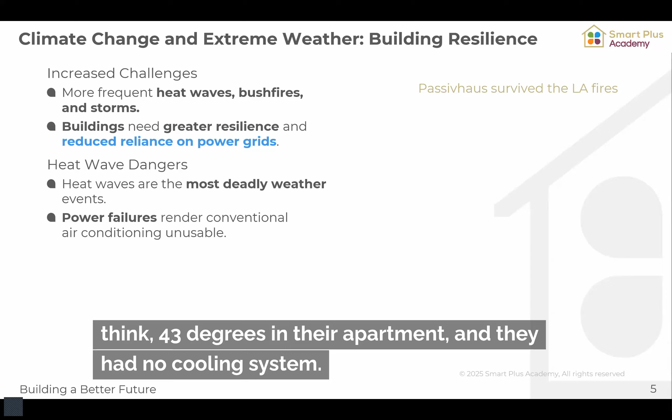When was that? Last summer, I think. There was an article in Australia where a resident was measuring, I think, 43 degrees in their apartment, and they had no cooling system. That's super, super dangerous. In 2003, we had nearly 70,000 people dying in the EU because of a 2-week heat wave, and that's coming more and more often as these changes keep happening.

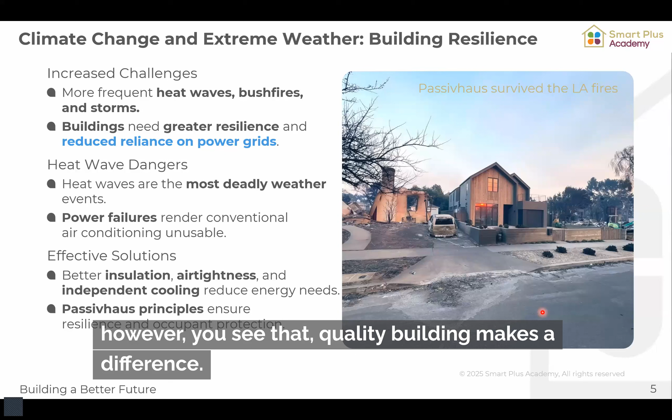Effective solutions are needed. We need better insulation, better air tightness, and an independent cooling system - and that is all what we have in the Passivhaus principles. I don't know if you've seen the posts all over social media regarding this special house that survived the LA bushfires - that was a Passivhaus. Passivhaus didn't necessarily make it survive, however, you see that quality building makes a difference. If you're thinking about how you're actually executing a building, you can have these benefits.

And everything else is burned down except this building in that state. So there you see that there can be a big difference.

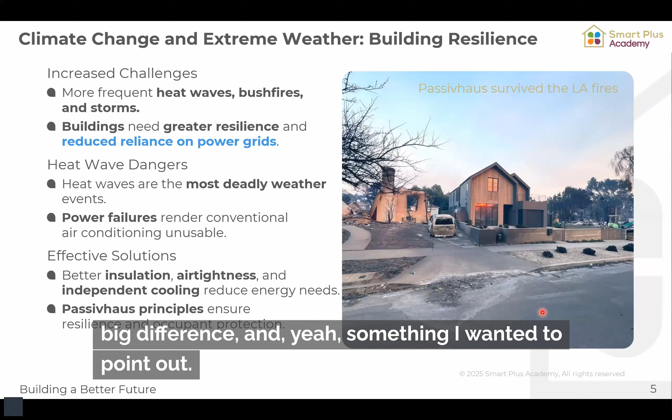Something I wanted to point out: electrification of everything is happening. We have a rising demand on our grid coming from this. Our buildings, electrification of transportation, all the electric cars, industry going electrical too, even steel plants, as we move away from gas and liquid fuels. This is putting a lot of stress onto our electrical system, our electrical grid, and that's what we have to consider in our design, because of the skyrocketing demand we are seeing.

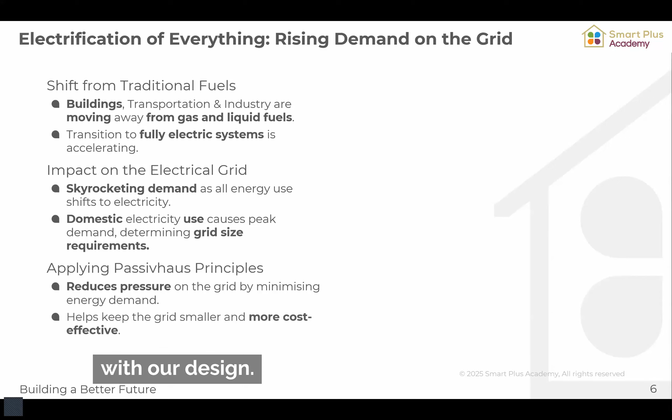This demand is mainly domestic, and we can change that by applying the Passivhaus principles. We can reduce the pressure on the grid and help make the grid more cost effective with our design. That's not necessarily a benefit to the builder, and not necessarily a benefit to the client, the end user, but society would actually benefit from that. That's something governance and decision makers need to consider moving forward.

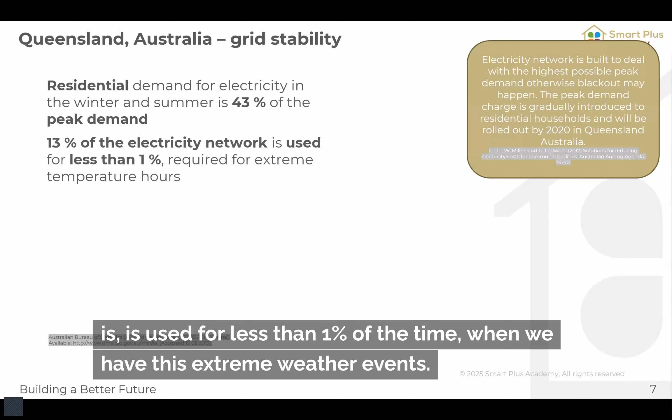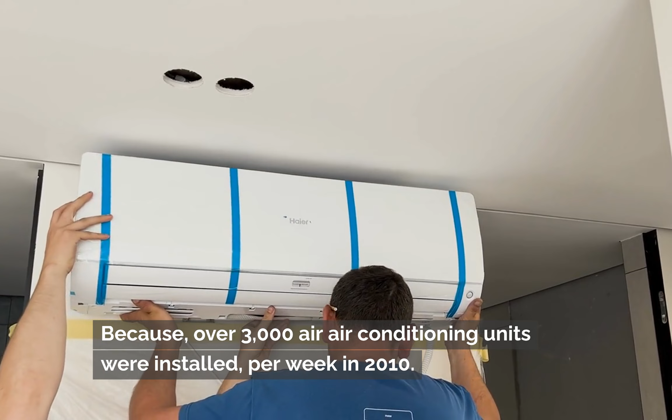Here's an example from Queensland that's already a few years old, but it shows exactly what the problem is. Residential demand is responsible for 43% of the peak demand, and 13% of the electrical network is used for less than 1% of the time, during these extreme weather events. Why is that happening? Because over 3,000 air conditioning units were installed per week in 2010. In Queensland, they had this massive investment into the electrical network, 15.6 billion dollars, which explains why 49% of the cost is actually network cost.

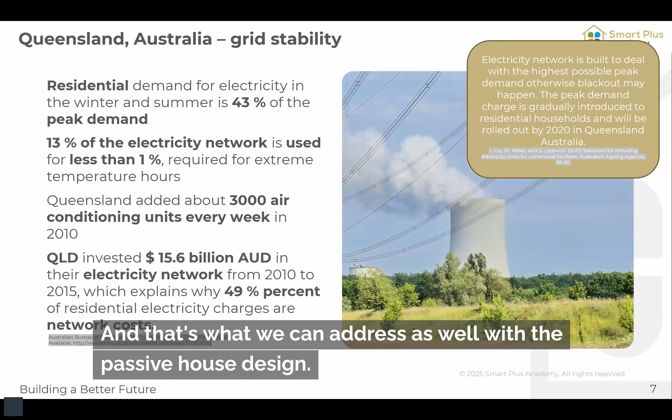Considering that everything needs to go now through these copper cables - everything that we used to put into our tank, the gas, the liquid fuel, needs to go through the copper cable - we need to expand this grid massively. However, if we create even higher peaks, that will start to become really, really uneconomical. And that's what we can address as well with the Passivhaus design.

Then there's bushfire smoke and indoor air quality. I guess we all remember 2019, where pretty much everywhere was smoke. With Passivhaus, we have an airtight building and mechanical ventilation, and by this we're able to filter the smoke out of the air, having better indoor air quality. For me it was really bad in 2019 because the smoke was just coming in, and I was trying to record videos and stuff, and I got asthma, itchy eyes, running nose, everything. So it was pretty bad. We can avoid that by living in a Passivhaus. Unfortunately I'm not living in a Passivhaus yet, but hopefully soon that will be happening.

So now let us look into Passivhaus principles and the benefits. First of all, we hear it all the time.

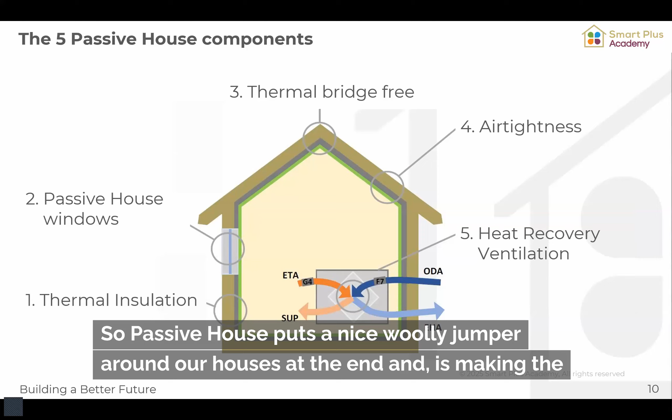There's thermal insulation. Passivhaus puts a nice woolly jumper around our houses, protecting the house against the thermal difference from the outside. This thermal insulation doesn't care if it's hot outside or cold outside. It stops the energy flow - it doesn't know where inside and outside is, it just stops that energy flow. And by that we have a far better performing house.

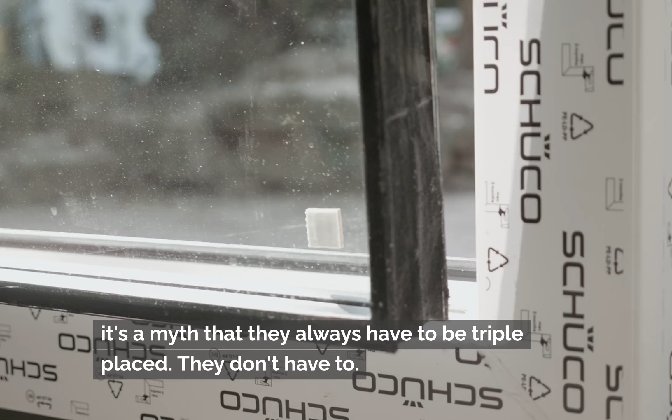Then Passivhaus windows. These are just windows designed for your climate and your location, so you don't have too much energy coming in. It's a myth that they always have to be triple glazed - they don't have to. Often in Australia in particular, we get away with double glazing because we have such a mild climate, and double glazing is good enough.

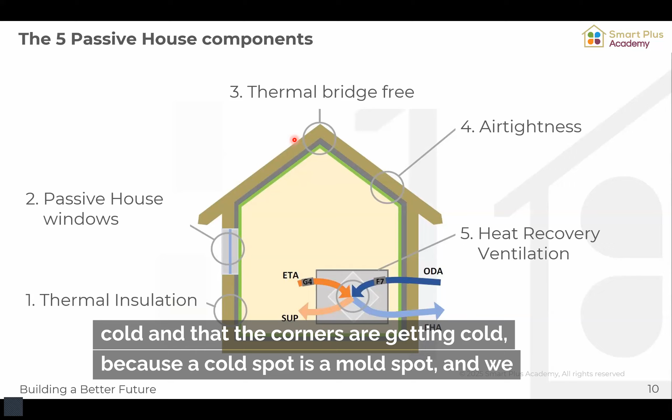Then thermal bridge-free design. That's where we make sure that nothing is getting cold, that the corners aren't getting cold, because a cold spot is a mold spot, and we want to avoid mold in our building for health reasons. Thermal bridge-free design is for me far more a health requirement than actually an energy efficiency requirement, and that's often misunderstood as well.

And then we have our air tightness, which is like putting a windbreaker over our woolly jumper. By that, we can have the biggest wind outside, but the thermal insulation is still working - our thermal woolly jumper is still working even when we're out in the wind. And that's what the air tightness is actually doing.

It helps us to get the thermal insulation to perform, that's pretty much what it is helping us. Otherwise, we have wind washing, and the wind washing is then reducing the performance. As we are now creating pretty much a closed box, we need to have our heat recovery ventilation unit that is ventilating the house and making sure that we're having fresh air in the house.

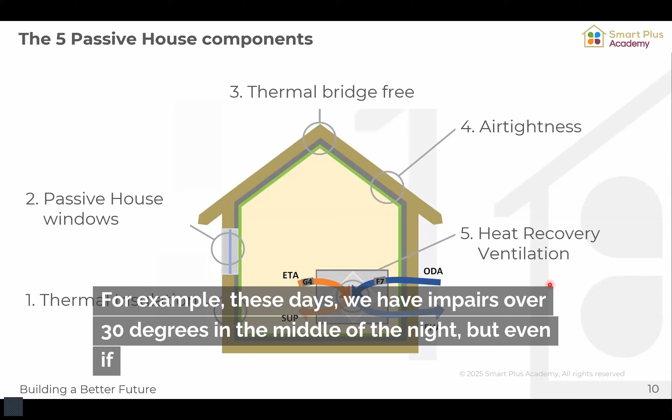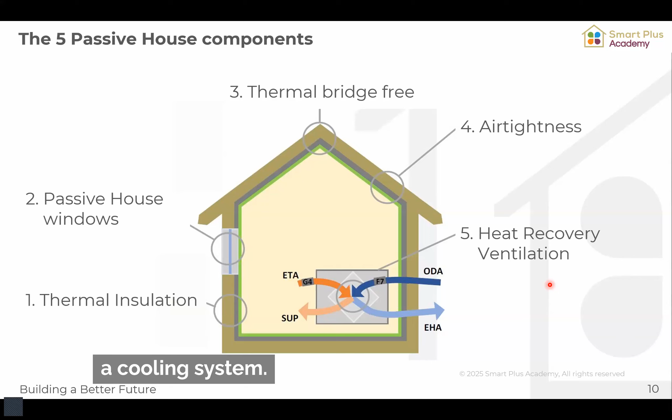Unfortunately, natural forces are not reliable. So just opening a window or having holes in your wall to have fresh air coming in is not sufficient, because the pressure difference between inside and outside is always changing. For example, these days we're having in Perth over 30 degrees in the middle of the night, but even if you open your windows, no air is moving at all, and you're just melting away if you're not having a cooling system.

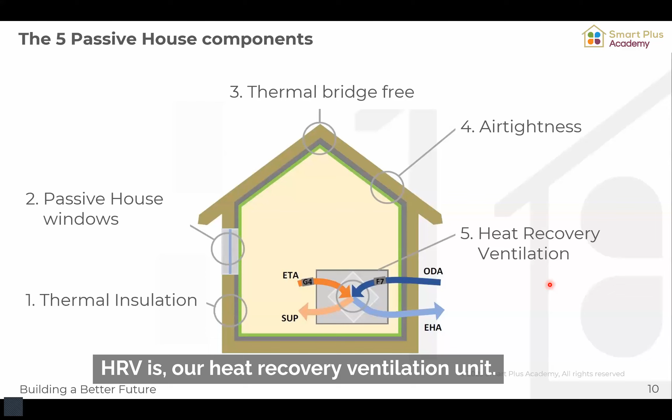So this idea of natural ventilation using natural forces doesn't work. That's the reason we need a mechanical force to actually move the air around, and that's what our HRV is, our heat recovery ventilation unit. If you're ventilating with mechanical force, then it makes sense as well to recover the heat so that the outside temperature is not coming into the building when we are ventilating. So at the end, it just keeps the indoor temperature indoors and the outdoor temperature outdoors.

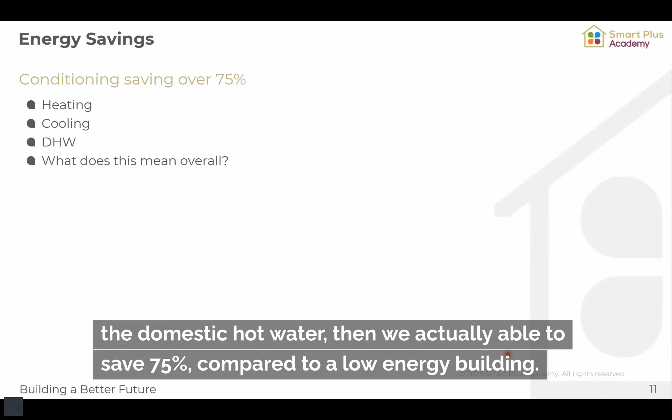So when we are now looking to how much energy we can save on the heating, the cooling, the domestic hot water, then we're actually able to save 75% compared to a low energy building. If we're comparing it to a traditional construction, then it can be savings of over 90%. And that's what Passivhaus is giving us for a little upfront investment.

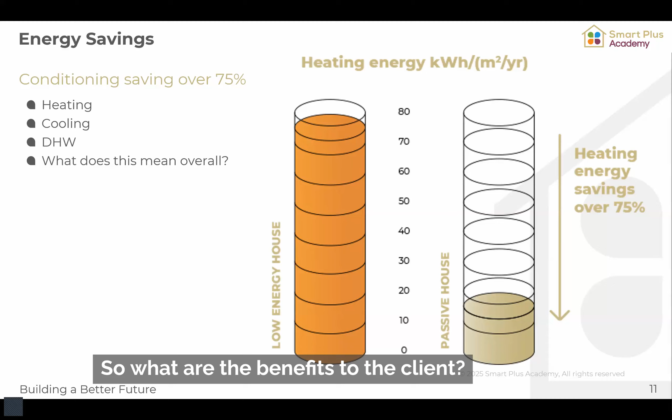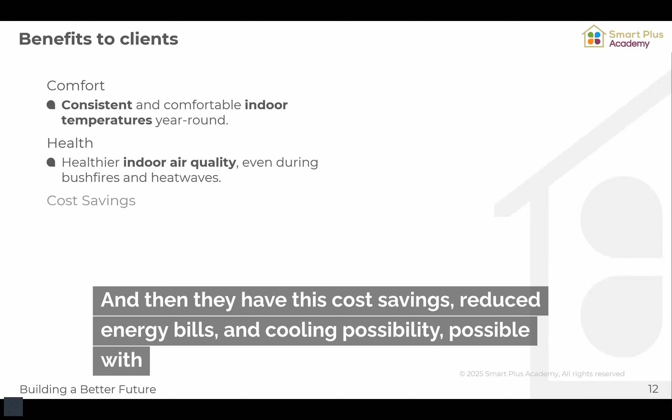So what are the benefits to the client? We have this consistent indoor temperature and indoor environment. We have the indoor air quality as well during bushfire and heat waves. And then we have this cost savings, reduced energy bills, and cooling possibility possible with solar energy production on site.

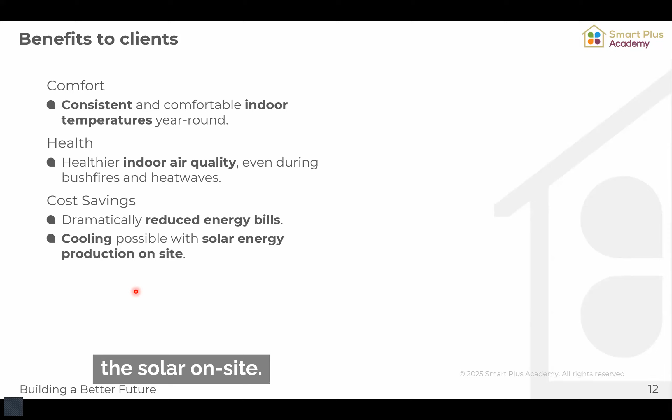So I think we should always design a building in a way that we can cool the building with energy produced on site, because if there's a power failure, then we can still cool our building with the solar on site. And that is as well possible with the Passivhaus approach, because the load that we are requiring for cooling is so small that we actually can achieve it with our little solar system on the roof. So, and then everybody's happy.

And as a client, the additional financial burden in the first year for Passivhaus is a coffee a day. That's all what it costs you, a coffee a day, the $4.73. After 10 years, it's a 7-Eleven coffee. And then after 19 to 20 years, we're coming to the break-even point.

And then after 30 years, when the loan is paid off, you're getting a free lunch every single day because you invested in efficiency, the loan is paid off, and now you're not having this running cost any longer. And with this, we are having our free lunch every single day.

This is not considering yet the benefits of green loans. So we can get green loans and lower interest rates. And with the lower interest rate, we're having a higher borrowing capacity, and our monthly would be actually lower than if you would buy a build conventional.

So sometimes we're coming actually to that point already that you have a benefit from day one if we are able to get green loans with a good reduction in our interest rate. And as well, projects that have fallen through before might be able to get through if you're going for Passivhaus, because with a lower interest rate, you're having a higher borrowing capacity. And with the higher borrowing capacity, you might be able to finance even the Passivhaus, because that lower interest rate is not just for the Passivhaus components, it's for the whole build. And by that, you're able to have a benefit.

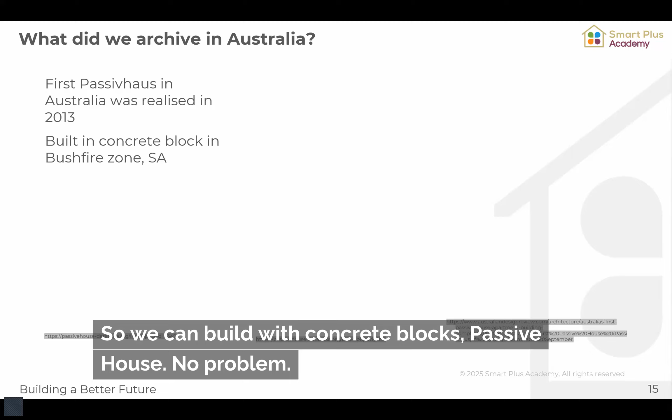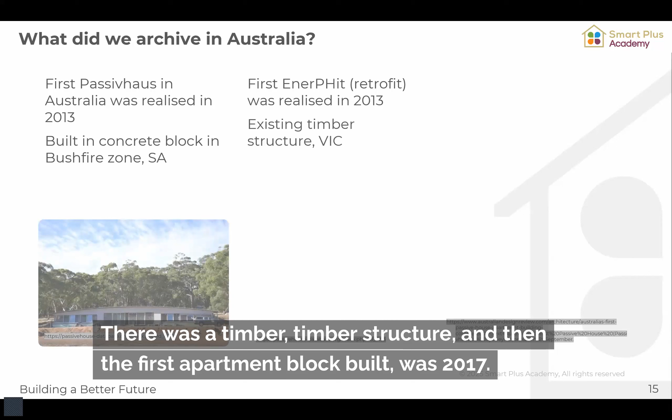So let's look at Passivhaus in Australia. Passivhaus started over 10 years ago in South Australia, where they built in a bushfire zone, and it was a concrete block building. So we can build with concrete blocks, Passivhaus, no problem. Then the first retrofit project was as well in 2013, and that was in Victoria. There was a timber structure, and then the first apartment block built was 2017. A little bit later, that was in New South Wales, and that was a concrete construction, conventional.

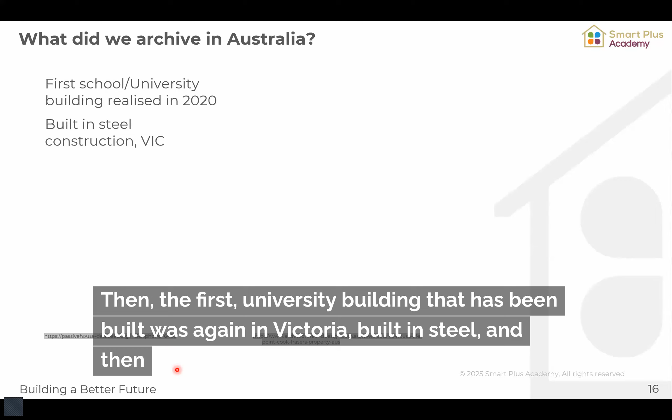Then I forgot the update - the first university building that has been built was again in Victoria, built in steel, and the first major developer was also in Victoria, though I don't know what construction method they used.

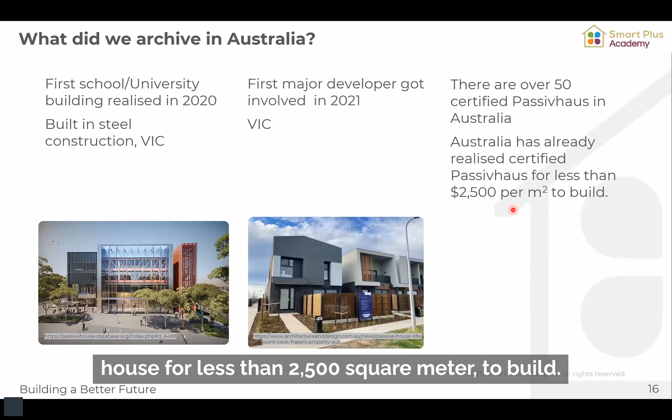It's not 50 certified passive houses anymore, it's now above 100. The more important part is that we achieved passive house for less than $2,500 per square meter to build. That's not the additional cost, that's the whole building cost, the square meter cost for building a building. And we've achieved that multiple times in Australia already.

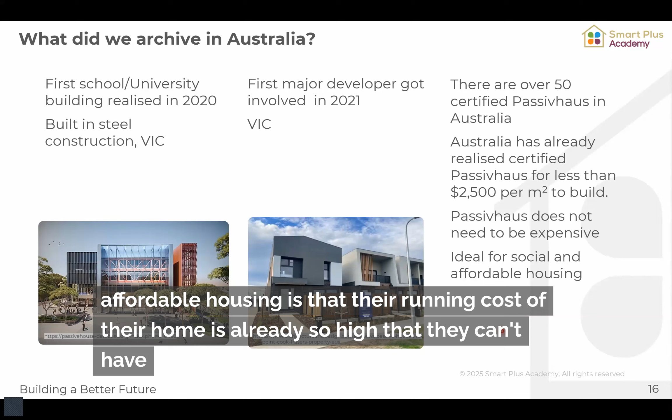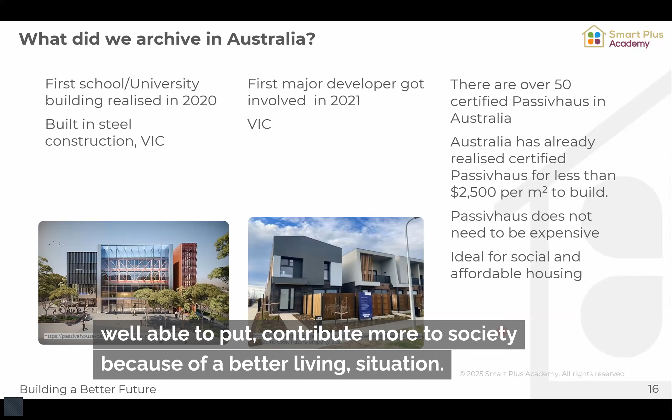So passive house does not need to be expensive. It's ideal for social housing and affordable housing, perfect for government projects, because the biggest threat for people who need social housing is that their running costs are already so high they can't have a proper life. If you give them a house that doesn't need so much running cost, they can afford better food, better education, and their lifestyle will be far better, and hopefully they're able to contribute more to society because of a better living situation.

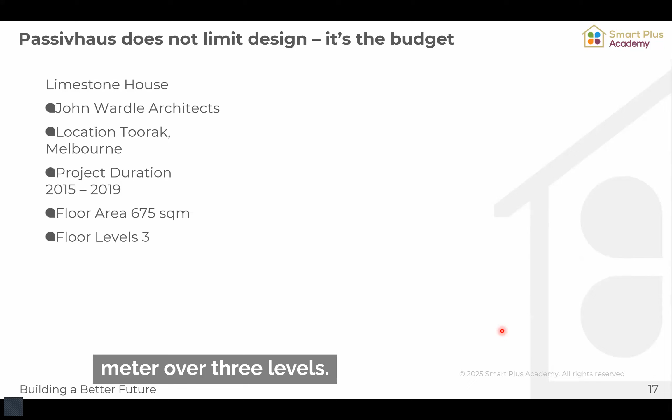However, it doesn't need to be that way - we can build crazy too. Here's John Wardle Architects, located in Melbourne, built between 2015 and 2019, 675 square meters over 3 levels. It won a passive house and living building challenge rating. This building cost a few million to build - I heard rumors it was around $8 million. So passive house can be expensive as well.

Passive house is not limiting your design, it's your budget. Keep that in mind - passive house can be really affordable and cost effective, but you can design everything to the passive house standard.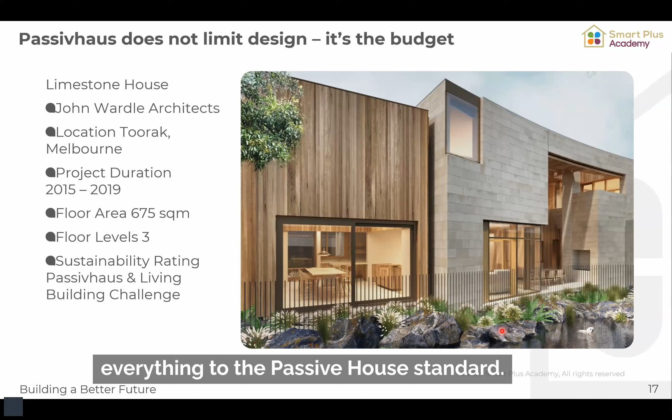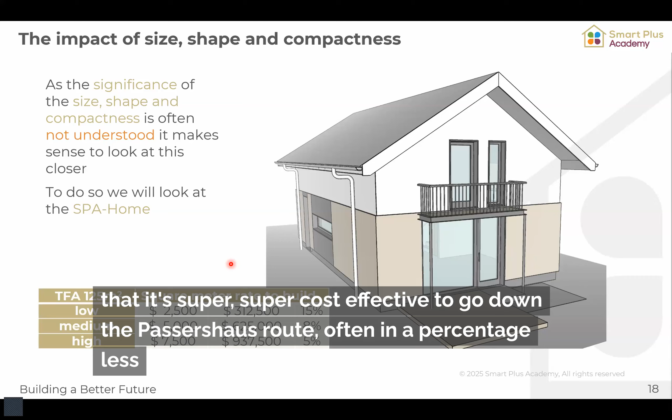This is because the passive house components are the same - it doesn't matter if it's high end, low, or medium, because we're not putting in a golden sheet instead of a high-performing membrane for air tightness. So no problem - the higher end the building, the more cost effective it becomes, especially commercial, because the ratio between building envelope and usable space is such a benefit that it's super cost effective to go down the passive house route, often in a percentage less than 1% or around 1%. So commercial works really well.

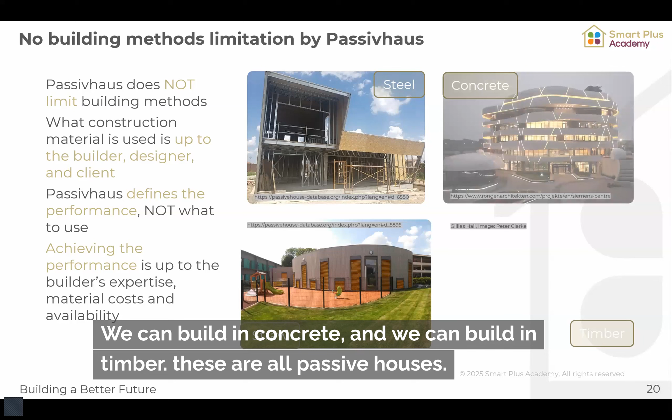So does passive house limit building methods and design? No, it does not. As we've already seen, we can build in steel, straw bale, concrete, or timber - these are all passive houses. Passive house is not limited in the building methods we use. It's a performance standard, not a material standard. So you decide what you use.

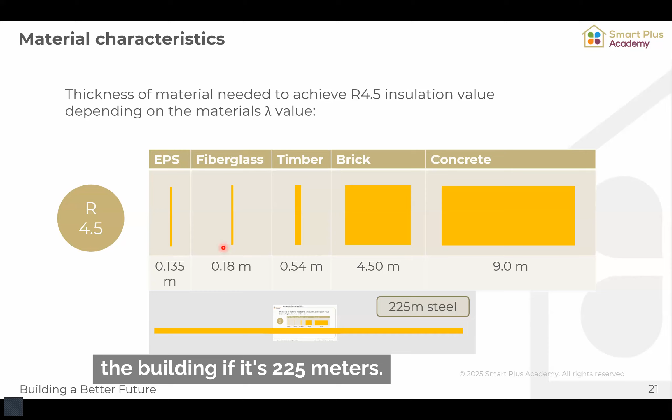For example, if you need an R value of 4.5, you can use EPS of 0.135 meters, so 135 millimeters, or fiberglass with 180 millimeters, or timber - CLT - which would need 0.5 meter thickness, or brick, which would need 4.5 meter thickness of a brick wall - you're not getting so much out of your lot any longer. Or use reinforced concrete, then we're at 9 meters, or steel, which needs 225 meters of thickness to achieve that R value of 4.5. Obviously that makes no sense, and you'd have a pretty far walk from your front door into the building if it's 225 meters, but you decide what material to use.

We are not saying one is better than the other. You use what is right for you, and it's not limiting design.

Even the Sagrada Familia in Barcelona could be a passive house if we would want to do it. Obviously, they're building now over 100 years on it already, and making a passive house would add a few years more, obviously, but theoretically it would be possible.

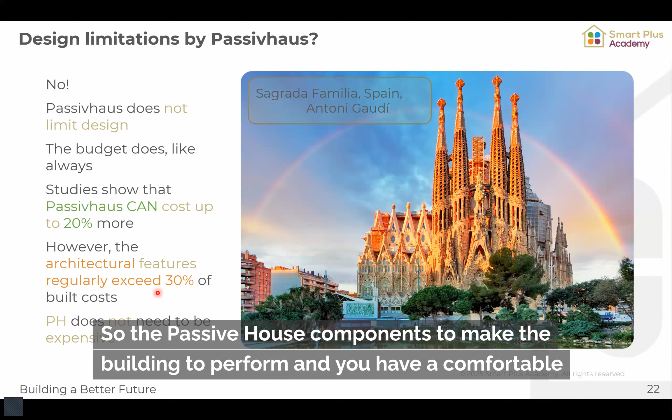We can say that a passive house can cost up to 20% more. However, we see that regularly architectural features cost 30% more. So the passive house components to make the building perform and give you a comfortable life are far cheaper than your architectural components, like your glazed handrails or your designer glass top that you're only using once a year, while you could get a really high performing building for far less than the architectural features.

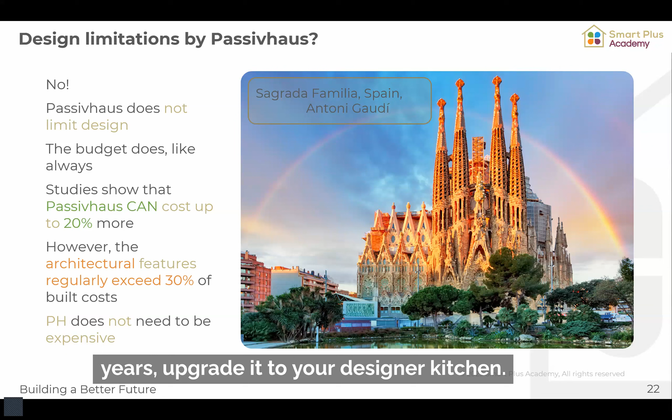And as well, you can only do that passive house stuff when we are building or when we are doing the retrofit. Architectural features can as well be updated in the future. So if you want to have your designer kitchen, maybe go first for an IKEA kitchen and then in 10 years upgrade it to your designer kitchen. And by that, you can still afford your passive house.

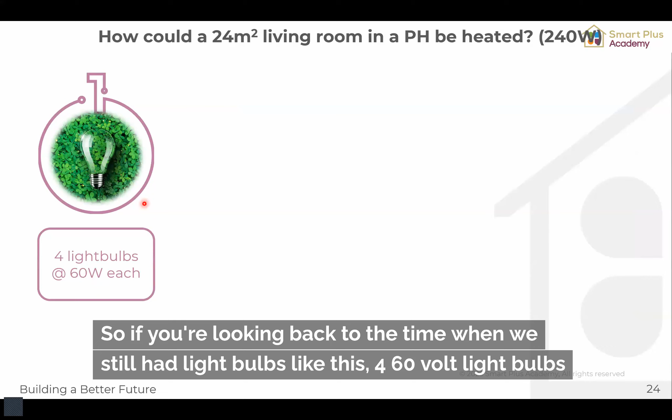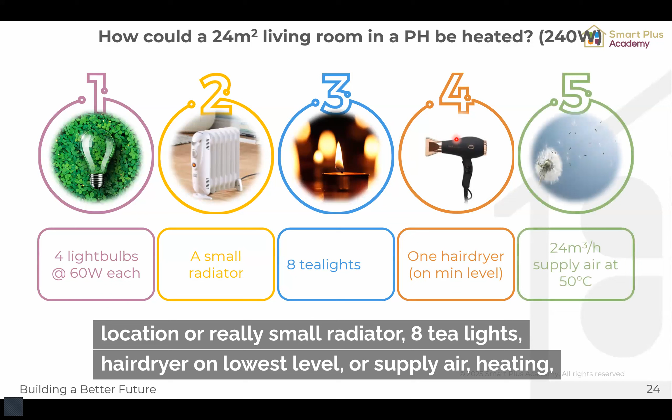So how energy efficient is a passive house? If you're looking back to the time when we still had light bulbs like this, 4 60-watt light bulbs would be enough for 24 square meters of living space to heat that on the coldest day of that location, or a really small radiator, 8 tea lights, a hair dryer on lowest level, or supply air heating, what is possible in a passive house.

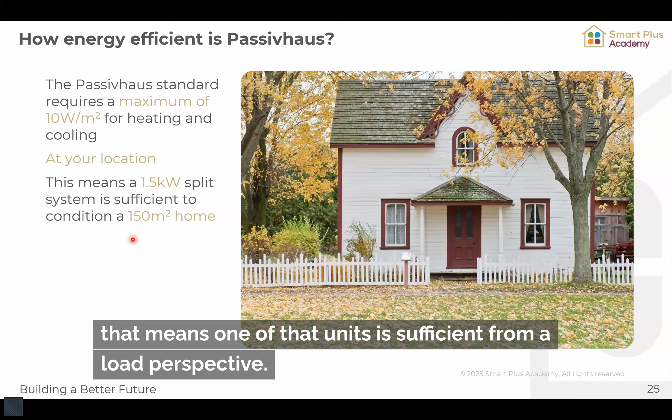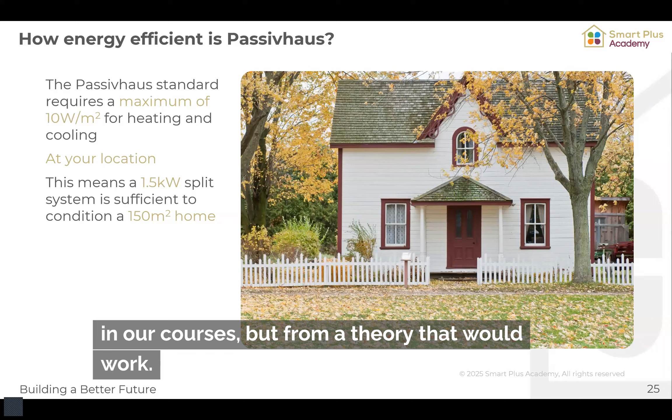But maybe going a bit too deep here already on what passive house is. If you're looking now to our 10 watts per square meter, and we are saying we have a 150 square meter home, then a 1.5 kilowatt system would be enough. These really small baby splits that we have, they're normally already 2 kilowatt or even 3 kilowatt per unit. That means one of those units is sufficient from a load perspective. I mean, it makes no sense to have only one outlet, but theoretically we could condition our passive house with just a baby split if it's 150 square meters. How to design your cooling is something we cover in our courses, but from a theory that would work.

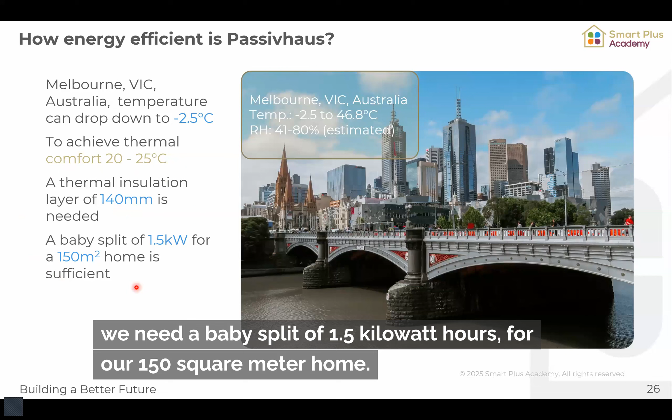So if you're now, for example, looking to Melbourne, where we have the lowest temperature of minus 2.5, then we want to achieve our 20 to 25 degrees. To achieve that, we would need a thickness of insulation of about 140 millimeters. And then we need a baby split of 1.5 kilowatt for our 150 square meter home.

If you're now going to an extreme, the Charlotte Pass in New South Wales, where the temperature goes down to minus 23 degrees, we want to achieve again our temperature between 20 and 25 degrees, but now we need thermal insulation of 340 millimeters because we are protecting against a higher thermal difference. And that's the reason we need a thicker insulation. That's like you're putting more layers of clothes on, because it's actually getting colder. And that's what we're doing here as well.

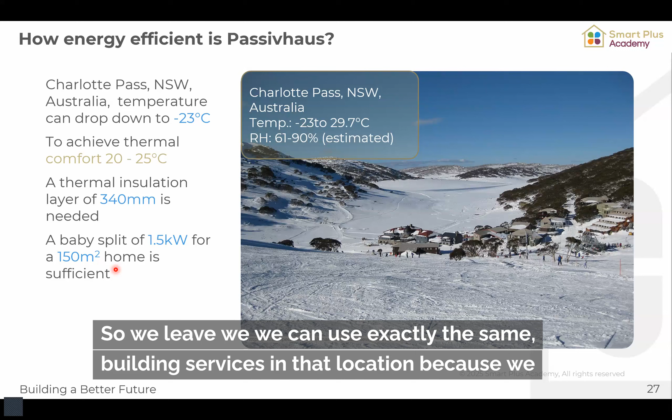And now we need, again, just a baby split of 1.5 kilowatt for a 150 square meter home. So we can use exactly the same building services in that location because we designed it so that it is efficient as a passive house, and all of them can work with the same building system.

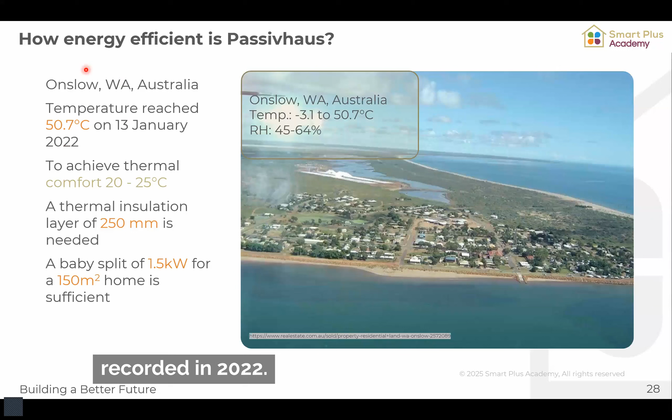If you now go to Western Australia, the hottest place where a temperature of 50.7 was recorded in 2022, there we again want to achieve the temperature between 20 and 25 degrees. And now to achieve that, we need 250 millimeters of thermal insulation. Now the thermal insulation is actually protecting us against the heat, not the cold. And here again, our baby split of 1.5 kilowatts for cooling is sufficient for our 150 square meter home. So that's how it works. Simple, easy, straightforward. And that's the beauty of a passive house.

If you're having a house designed that you spend a lot of time on designing, and now you want to build that house in multiple locations, the only thing you have to change is your thermal envelope performance, the thickness of your thermal insulation, maybe the glazing of your windows, and that's all you need to change. The rest of the building can stay the same.

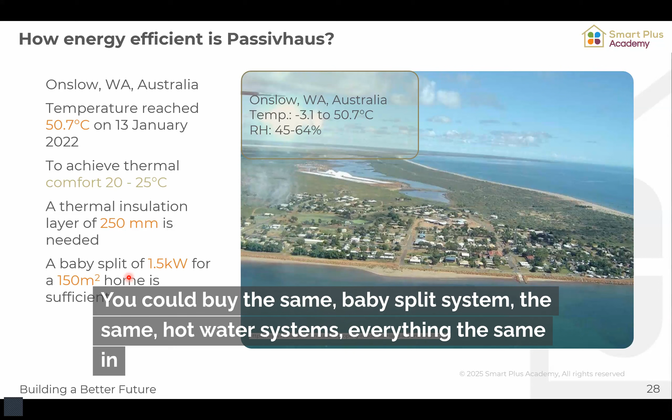Especially if you're going down the prefabrication route and modular construction, this is such a huge benefit because you don't need to change your systems. You could buy the same baby split system, the same hot water systems, everything the same in quantity, and actually use that. It doesn't matter where you build because the performance will always be the same.

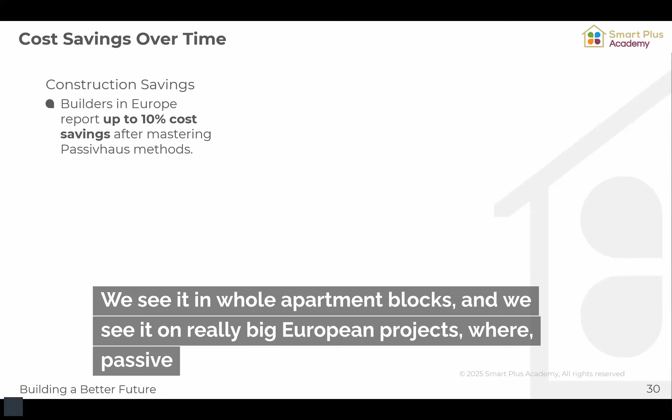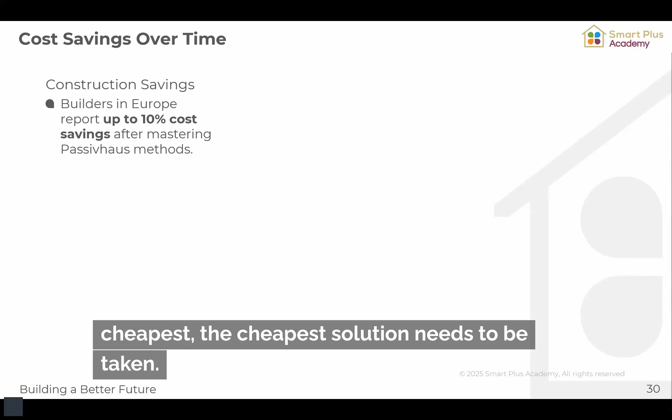That's a huge advantage of Passivhaus. So now a real world example, more on the builder side. What is the benefit of Passivhaus? Cost savings. I know from builders in Europe who report that after normally 7 years, they can deliver Passivhaus for 10% cheaper than conventional buildings. We see this more and more in residential freestanding houses, in whole apartment blocks, and in really big European projects where passive houses win the rigorous tendering process, where the cheapest solution needs to be taken. Often passive houses win this process, not because they're passive houses, but because they're cheaper.

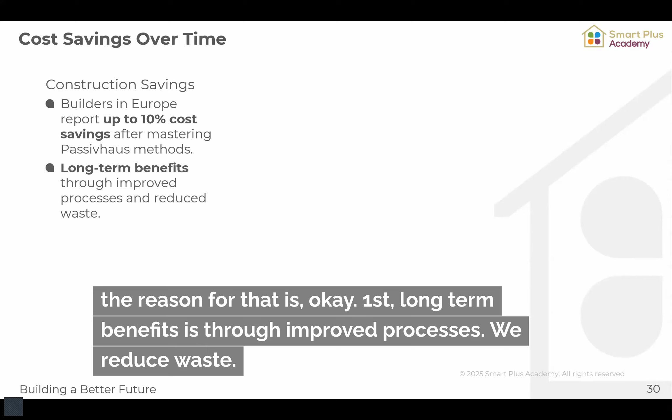The reason for that is, first, long-term benefits through improved processes, we reduce waste. With this, we need less material. With this, we're saving on the material side and having a smaller impact on the environment. Then through standardization, we streamline workflows, and with this we're able to reduce mainly labor costs. So now from a performance perspective, this is looking to the client's benefit again.

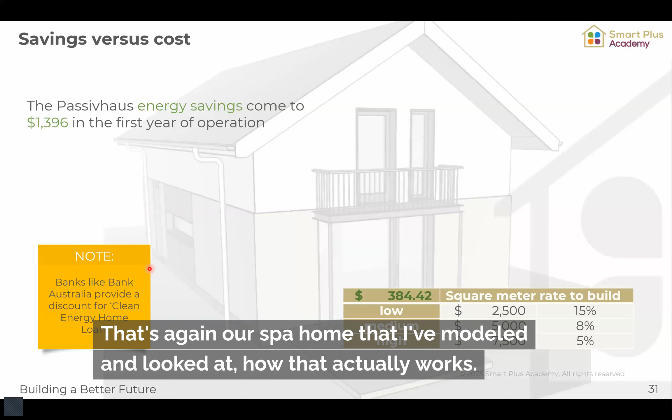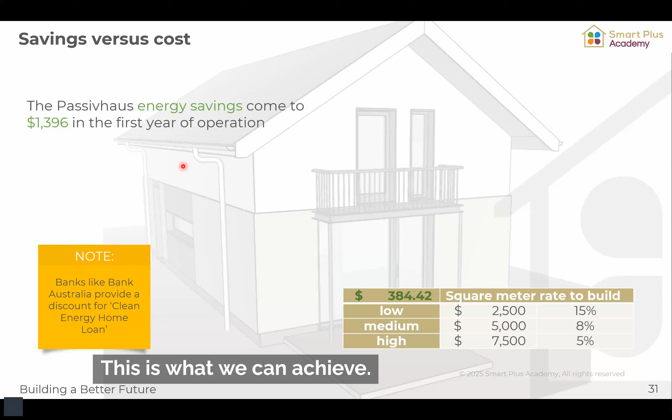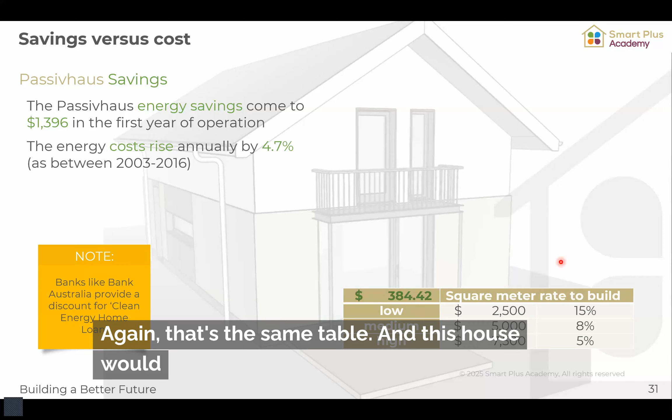That's again our spa home that I've modeled and looked at how that actually works. We said we're having a saving of $1,396 a year in energy savings for that house, to some extent from domestic hot water, but mainly conditioning. This is what we can achieve. The energy costs are rising by 4.7%. The additional cost for Passivhaus is just under $400 per square meter. Again, that's the same table, and this house would cost an additional $48,000 if we build it like this.

However, if it's a developer building the same house over and over again, I spoke with a guy who said he's able to push that $48,000 below $20,000 in additional costs if they develop something like 20 houses in one go, because the architecture costs and the modeling are strongly reduced and they can buy material far cheaper. So the additional cost becomes $20,000.

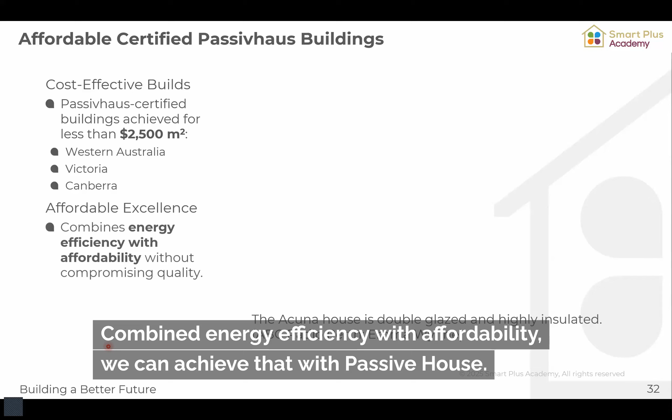So we have a lot of benefits here as well. Affordability of passive house is possible, as already mentioned. We've achieved multiple passive houses for less than $2,500 per square metre, in Western Australia, Victoria, and Canberra at least. There might be more places now, and affordable excellence is possible, combining energy efficiency with affordability. For example, this Acuna house by Carlos Acuna in WA, where they achieved that.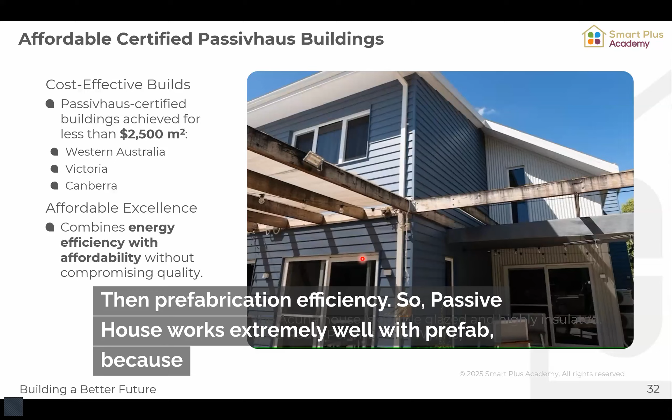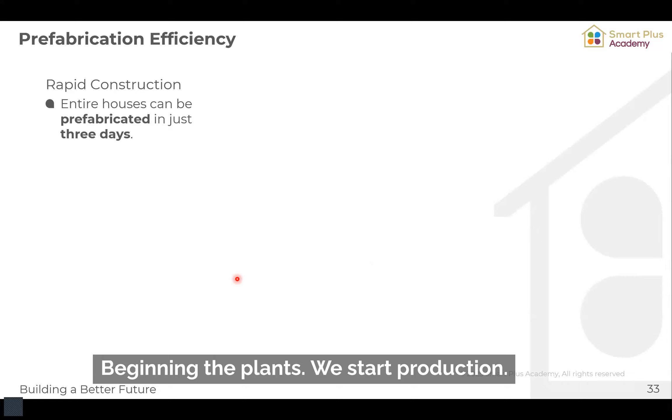Then prefabrication efficiency. Passivhaus works extremely well with prefab because it's not just a philosophy and an energy efficiency standard, it's also a process of walking through a building. Entire houses can be prefabricated in just 3 days. That's what we've already achieved. We get the plans, start production, and 3 days later the house panels are standing in the factory. This is possible, and by this we're reducing labor costs and having faster project times.

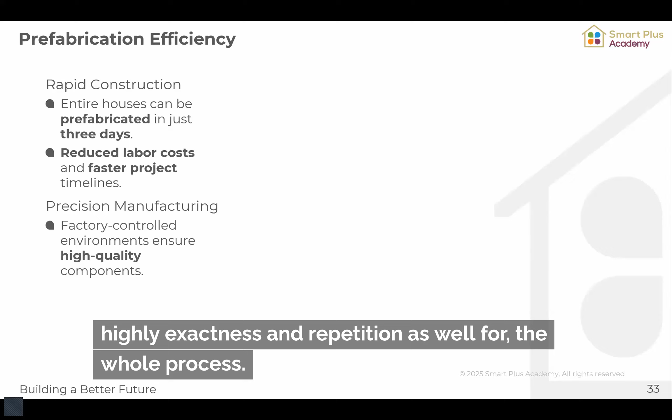So we're saving for the client the double cost of renting and paying for that building project, and we're saving on labor costs for the builder too. By that, we can actually reduce cost. And then the factory controlled environment creates high exactness and repetition for the whole process, and with this we're able to save energy again.

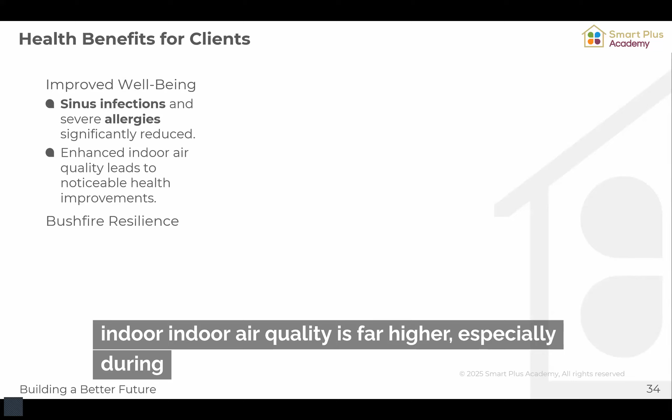Now back to the client. The clients have then improved well-being. I know clients that have less sinus infection, allergies and asthma. The indoor air quality is far higher, especially during bushfire, so we can filter out the bushfire smoke and pollen for people having hay fever. We can help these people, like the client down in Denmark. So this is as well an advantage.

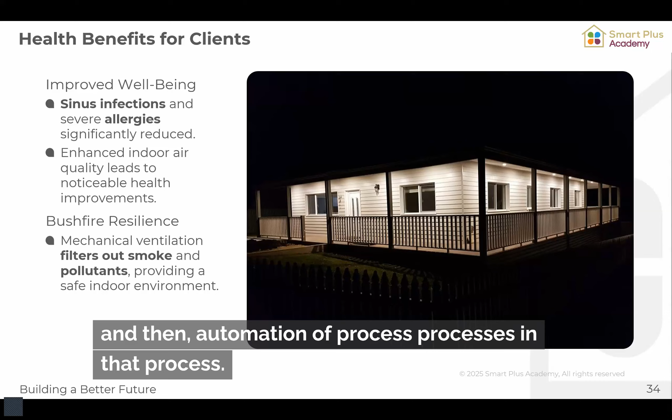Another one on the builder side is that we're anyway creating a digital twin for the performance already. And this digital twin is something that we can then use in the prefabrication process. By that, Passivhaus is able to work hand in hand with prefabrication, digital twin, and automation of processes.

So when we look at our Passivhaus Tradesperson course, it's far more than just a course. It's the foundation for high-performing buildings, like our students here in the chat, and it's future-proofing for builders. You're staying ahead of regulations, so you don't need to change your detailing and execution the whole time because you're already outperforming your required performance. You're having far fewer changes in your building company because you're staying ahead of regulation changes and don't have to change it every few years.

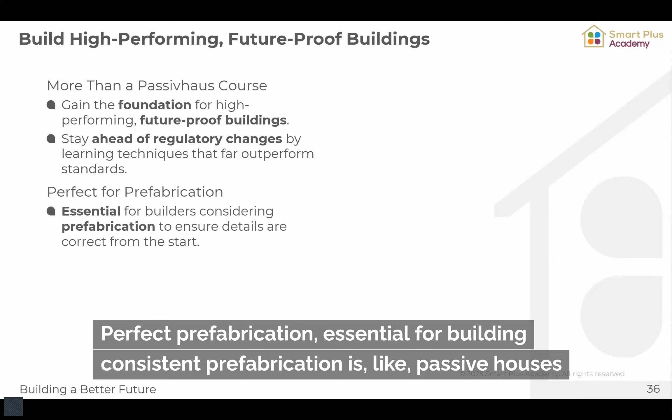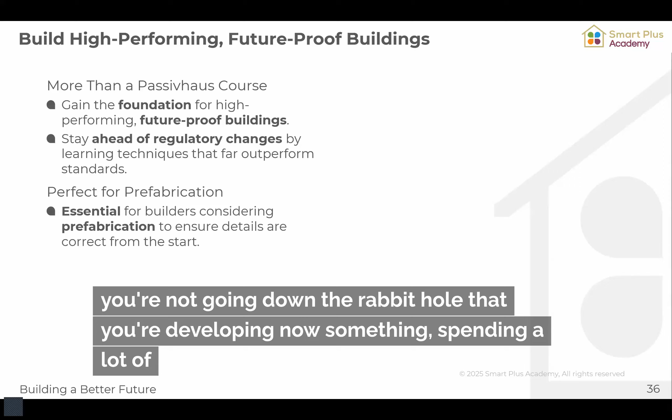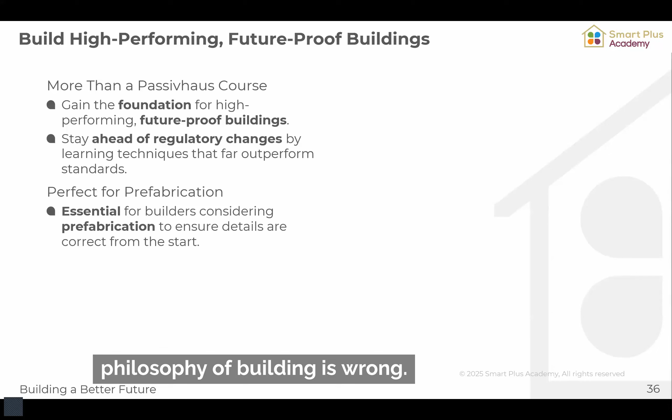Perfect prefabrication is essential - building consistent prefabrication means passive houses need to be already really exact. If you're going down the prefabrication route, you need to get your detailing right so that you're not going down the rabbit hole of developing something, spending a lot of money on it, and then a few years later realizing your whole detailing and philosophy of building is wrong. That's the reason you really need to do this course if you want to go down the prefabrication route, to understand how the buildings of the future will be built - not necessarily because of the Passivhaus qualification you're gaining, but because of the knowledge you're gaining that is needed as the foundation for future-proof buildings.

And then we're having prefabrication success only with precision, and this is what Passivhaus is already asking for - that precision - and that helps already.

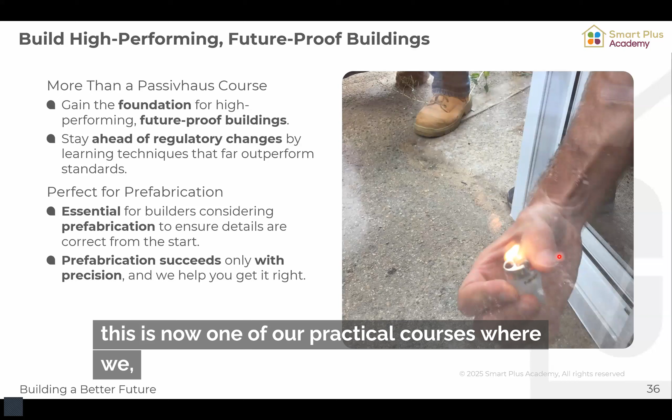This is now one of our practical courses where we're showing where the layer of coating is on the window, that's what the picture is showing. Then in the tradie course, we're showing really clear solutions like we can see here - our timber frame solution, the Californian corner - explaining why the conventional approach is not working because we are not putting thermal insulation in that corner where we already have a thermal bridge. With no insulation in there, we have far worse situations. That's the reason we are showing that in a really simple way.

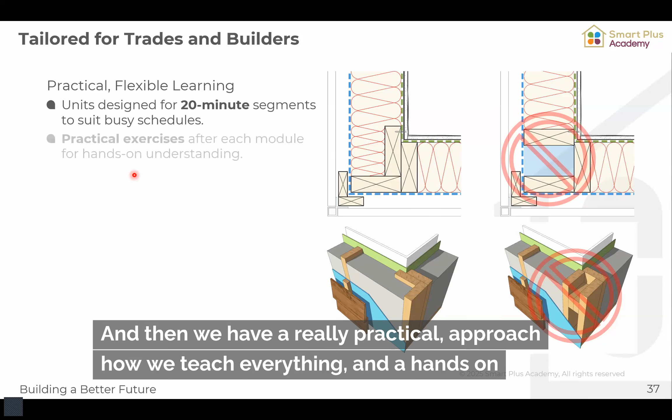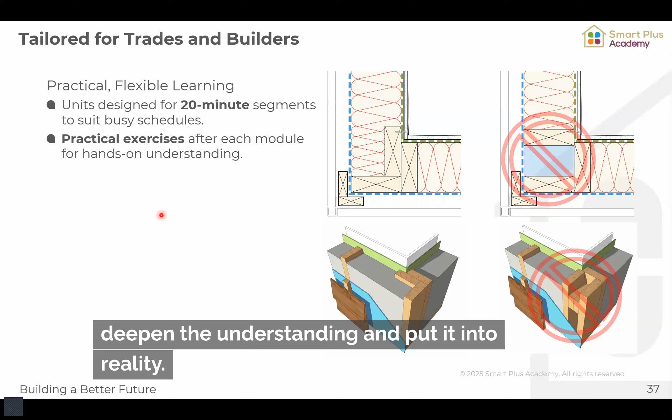Then all our units are brought down to 20 minutes, so it's really handy for a busy schedule because you can choose when you do these units yourself. We have a really practical approach to how we teach everything, with hands-on understanding, exercises, questions and all the bits and pieces that help you deepen your understanding and put it into reality.

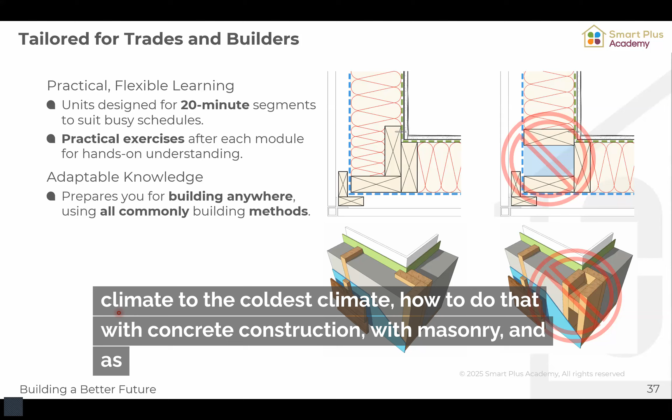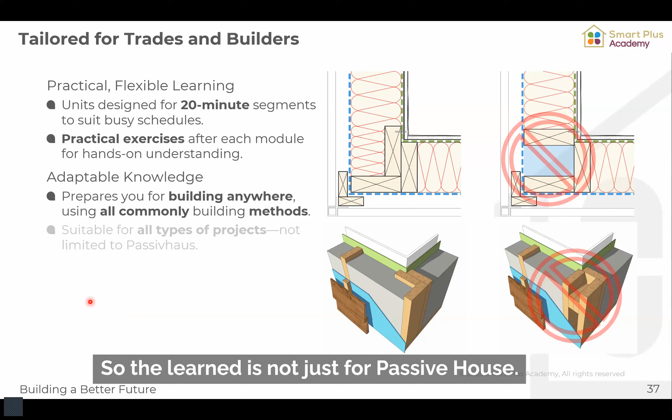Adaptable knowledge - you can use that knowledge to build anywhere in the world, in any common building method, in any climate zone. We teach it in a way that shows you how to design a timber frame from the hottest climate to the coldest climate, how to do that with concrete construction, with masonry, and alternatives like SIPs or straw bale construction - we have a glimpse of that too. So the learning is not just for Passivhaus, it's for any project you touch afterwards, which will be impacted beneficially because you learned that and you're applying it.

The certification is internationally recognized, so you're gaining that knowledge - that's what you really want. But additionally, you're getting your internationally recognized certification that helps find jobs because you'll be listed on a list of professionals if you want, so they can find you and reach out to you. It opens doors to opportunities and shows your credibility in the industry. Normally people that value quality building and energy efficient buildings are more enjoyable clients to have - that's what I can say here.

Cool, so that was our webinar, a short overview of what's happening. Any questions here? Were there questions coming up or anything?

Not in the chat, Daniel. Online, Nala, did you have any questions coming up? None so far, Daniel. None so far, cool. So any questions here right now?

So this was like a really short introduction to the whole thing, flying through it. Maybe you were able to take a few things out of there, especially about designing a building so that you can cool on site.